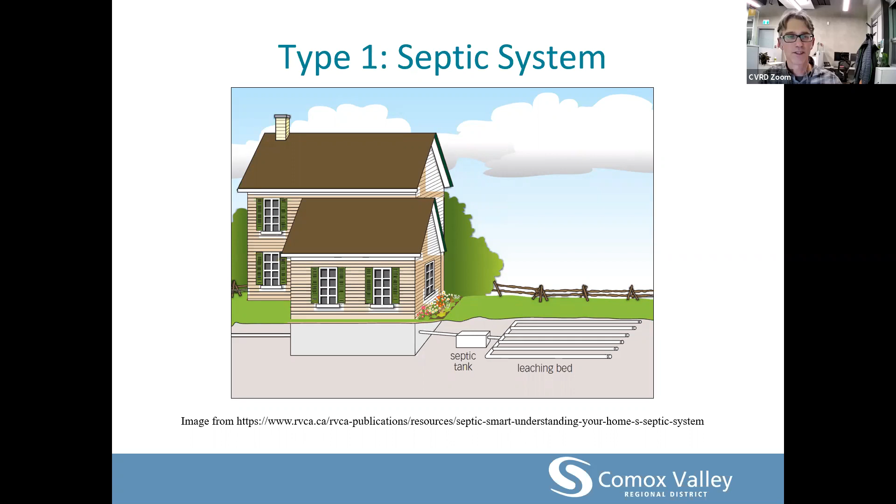There can be many different styles, dimensions, and plans for septic systems, taking into consideration factors such as soil type, topography, and drainage.

Here's a little bit more about what's inside a septic tank. Depending on the age of the tank, there might be one or two compartments. The purpose of the septic tank is to separate liquids from solids and to start to break down the organic material in wastewater. So as the wastewater comes out of the house and into the septic tank, its velocity slows down and the heavier materials settle into the bottom of the tank—this is called the sludge layer—and the lighter materials float up to the top and form what's called the scum layer.

Anaerobic bacteria present in wastewater will start to break down the materials in the sludge layer, but don't break it down completely, and this is why septic tanks have to be pumped out over time. In a two-chamber tank, you have a baffle here, and this directs flow out of this primary chamber, and also helps to prevent solids from getting out the outlet tee and into your drain field.

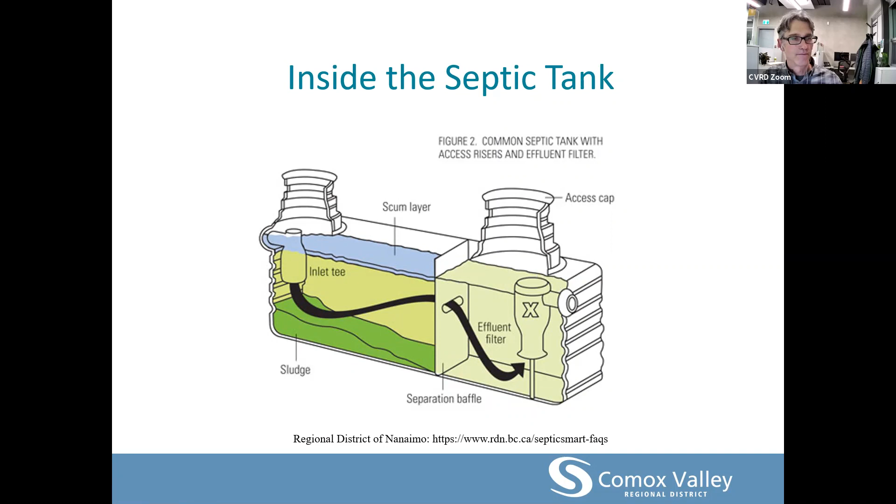Now the next types of systems, these are your type 2 and type 3 systems, also known as package treatment plants. These provide a higher level of treatment to produce better water quality, and they achieve this through aerobic treatment technology where air is pumped into the system.

A type 2 treatment plant will produce an effluent with a consistent quality of less than 45 milligrams per liter of total suspended solids, or TSS, and a 5-day biochemical oxygen demand, or BOD, of less than 45 milligrams per liter. A type 2 system is typically used where site conditions make it impossible to install a conventional septic system. This could include things such as a high groundwater table, bedrock, poor soil conditions, or a smaller property where you don't have the ability to meet setback distances from surface water, wells, or property boundary lines.

The treated effluent from a type 2 system can typically be discharged into a smaller area than that required for treatment by a conventional drain field.

Type 3 is similar, although it produces even better quality effluent containing less than 10 milligrams per liter of TSS and 10 milligrams per liter of BOD. Effluent from a type 3 system will typically be clear, and a type 3 system is typically only used in the toughest site conditions.

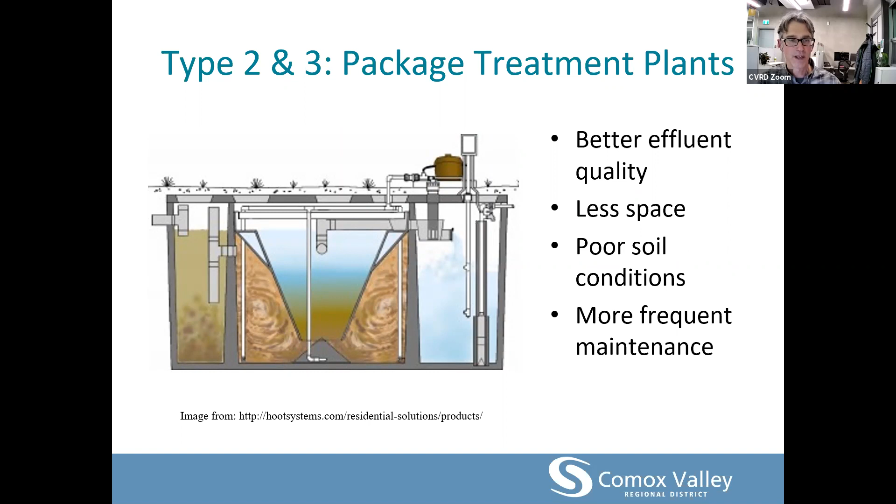Next, this illustrates risers. You could see them sitting on top of the septic tank in the previous slide. These are installed to make maintenance of your septic tank and other components of your system a lot easier. If you've got risers on your tank, next time it needs to be inspected, it doesn't have to be dug out. And these riser lids are also visual cues of where your septic system components are within your yard.

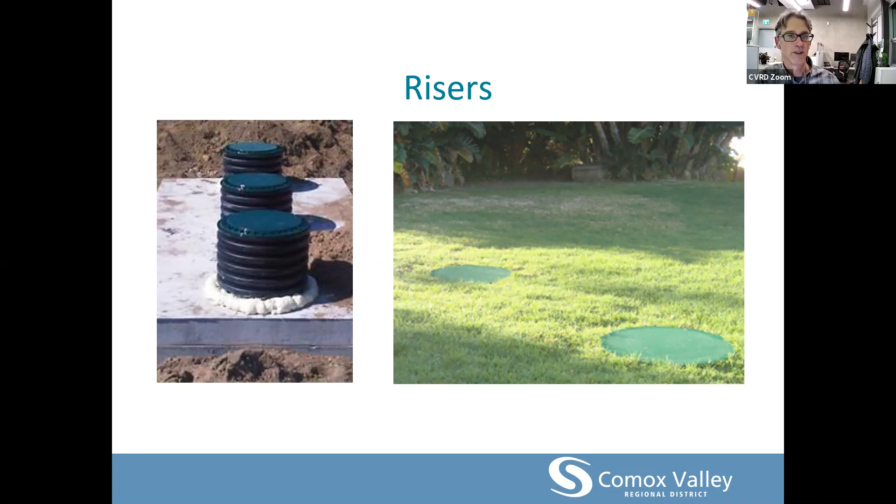Next thing to consider is an effluent filter. Effluent filters can help maximize the life of your system by providing another barrier for solids that didn't settle out in your septic tank, filtering them out before they get out into your drain field where they could cause problems. Effluent filters do have to be maintained, but it is a better option than having solids getting out into your drain field and causing issues.

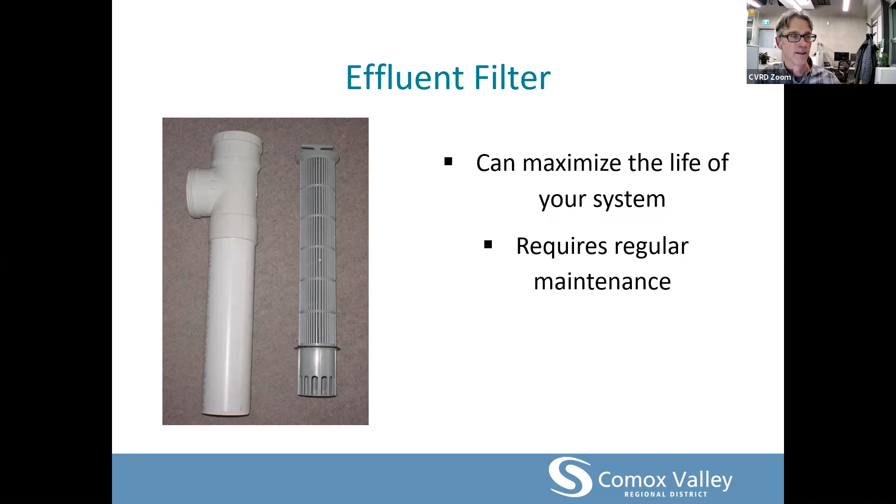Next is the distribution box. This can be considered the heart of your gravity-fed system. In the distribution box, the effluent comes in from the left, as shown on the graphic. The purpose of the distribution box is to ensure that equal amounts of the effluent travel to all the different runs within your septic field. This diagram shows speed levelers, and these make it easy to level out the effluent level within the distribution box, facilitating an equal amount of effluent getting out into all the runs of the drain field.

This is important because you don't want all of the effluent going out into one run and overloading the soil in that part of your drain field.

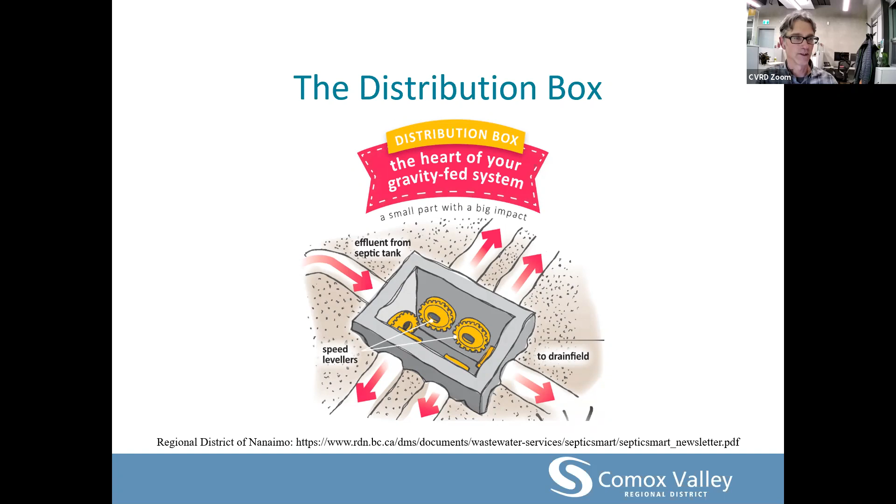This slide shows how a typical drain field would look while it's under construction. A drain field typically consists of 3 to 6 trenches, 18 to 24 inches deep, with perforated pipe laid in gravel, covered by soil. Underneath the soil is what performs the final wastewater polishing before the wastewater gets down to the barrier layer, whether that be the groundwater table or bedrock.

So the performance objective for effluent before it reaches the barrier layer is for it to meet recreational water quality guidelines or better. This is important because the effluent may not be fully treated once it reaches the water table and could still contain pathogens. That's why there are also setback distances to wells, breakout points, and water bodies that are very important. These setback distances are a final step in protecting public health.

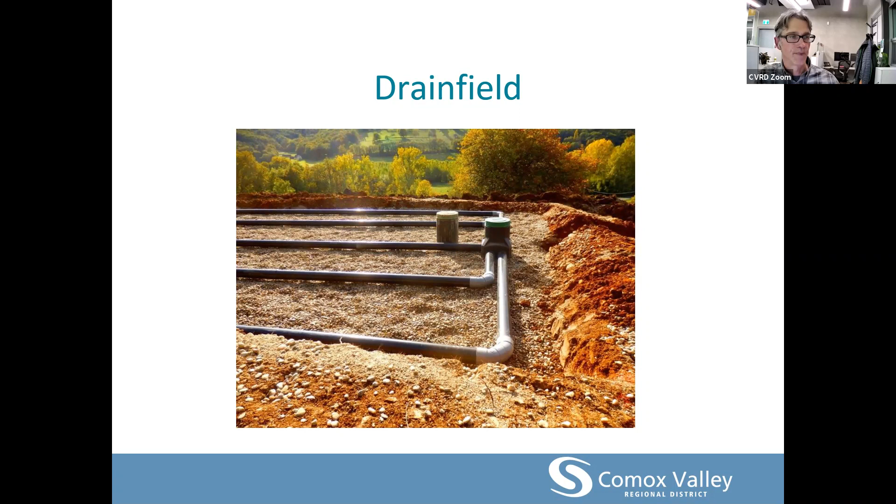Pressure distribution can be used instead, where a pump delivers doses of wastewater under pressure out to the laterals of the distribution system. The system consists of smaller 1 to 2 inch diameter laterals with small discharge orifices, and the pressure from the pump pushes the wastewater out of the laterals and into the soil for final polishing.

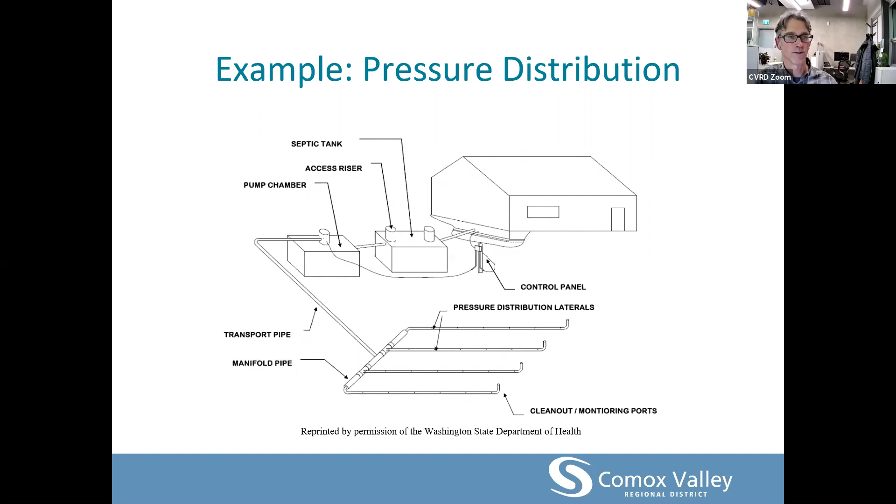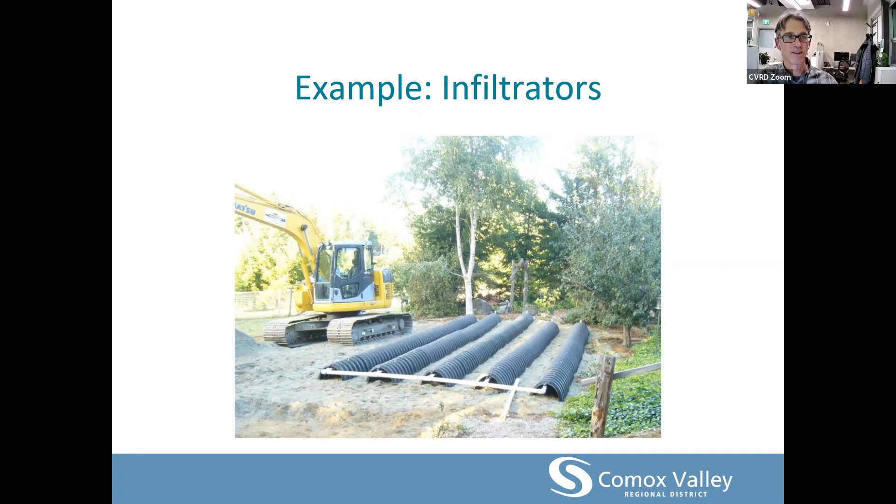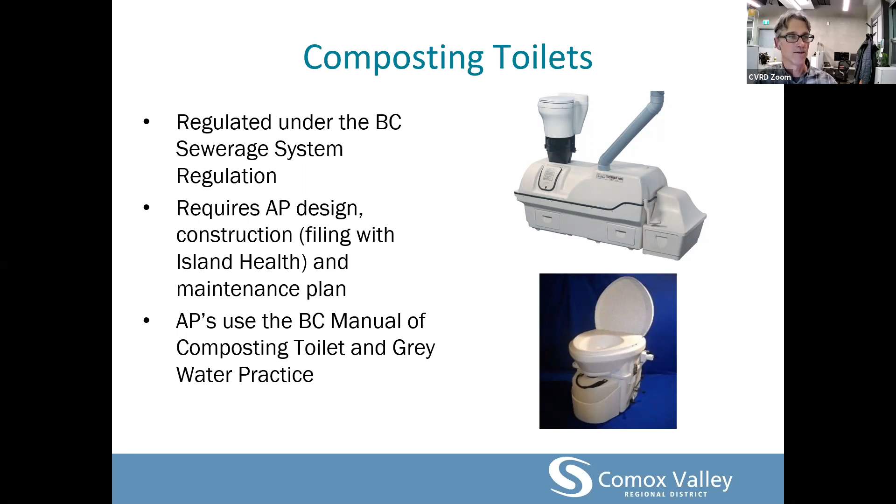In the next slide, we'll talk a little bit about composting toilets. These can be an effective option where water supply is constrained. Composting toilets are also regulated under the BC Sewerage System Regulation, and they require authorized person design, construction, and a maintenance plan. Authorized professionals can use the BC Manual of Composting Toilet and Greywater Practice to guide the design and installation of a composting toilet system.

Some pros and cons of composting toilets: as said, they conserve water, so in areas where water supply is constrained, they can help reduce indoor water use. This also results in less sewage effluent flowing out into a wastewater system and into the environment. This can make composting toilets an alternative option where there are constraints that limit the use of a conventional septic system.

This can also reduce stress on an older septic system and keep it operating a bit longer than if conventional toilets were being used. There's also potential for beneficial reuse of the compost from the composting toilet, termed residual organic matter, or ROM.

In terms of considerations, composting toilets can be more expensive. There can be odor or insect issues if they're not properly managed. They require an electrical supply to add extra heat or ventilation for the composting process. The composting process can be challenging to manage, as can management of the residual organic matter. It's also important to note that a sewage system is still required for all the greywater coming out of the home.

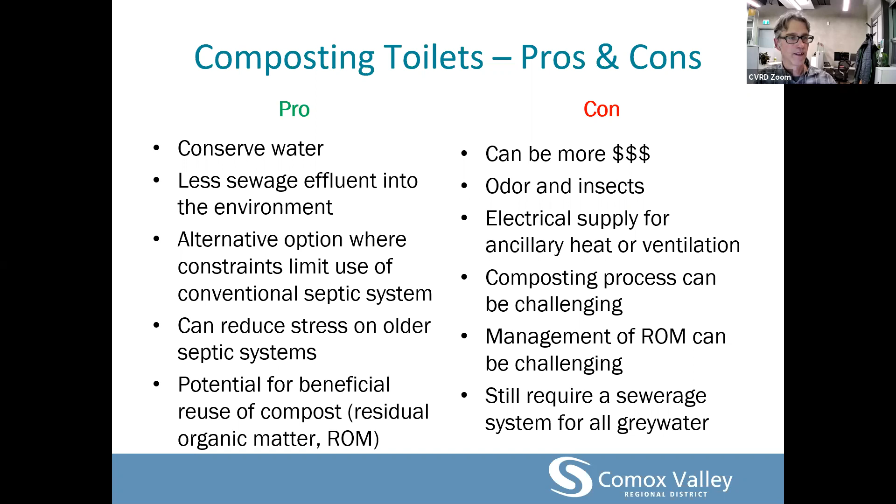Let's talk a bit about septic system care. The first step is locating your system, and judging by the poll, it looks like most of you knew where your system is, so that's good.

The next step is to create a simple sketch of your system. The maintenance record we provided on our website has an area on the back where you can draw a diagram of your septic system and include measurements to a corner of your house or other landmarks on your property, so it's easy to locate in the future.

If you are unsure where your system is located, you might be able to obtain a copy of your paperwork from Island Health. There could be a construction permit on file if your system was built between 1968 and 2005, or a sewage system filing should be on file if it was built after 2005.

Another thing to consider is whether your system is big enough. If the use of your household or property changes—for instance, you're adding a basement suite or an Airbnb suite, or more family members are moving into your home—it might be important to assess the capacity of your septic system to ensure it can handle the change in use of your property.

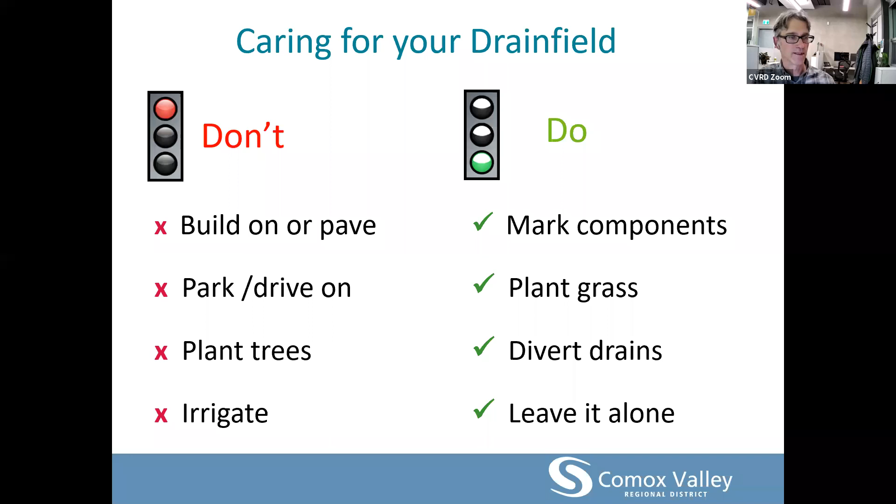Another consideration is water conservation. This is a key element to keeping your septic system healthy. Too much water use can flush solids into your drain field and can also saturate the soil. This can affect the drainage of your drain field and the bacterial action treating the wastewater. Minimizing water use helps keep the solids settled on the bottom of your septic tank and improves the efficiency of your system.

You don't want to overload your system, as this can cause premature malfunction. Overloading it can take the form of doing too many laundry loads over the course of a day. It's a good idea to spread your laundry loads out over the day or over the week.

Conserving water is particularly important if you have an older septic system. Older systems were designed when people used less water. This means that if your system is older, it might be under capacity compared to today's standards. There is more information on water conservation in one of the septic fact sheets available on our website and as part of the participant package.

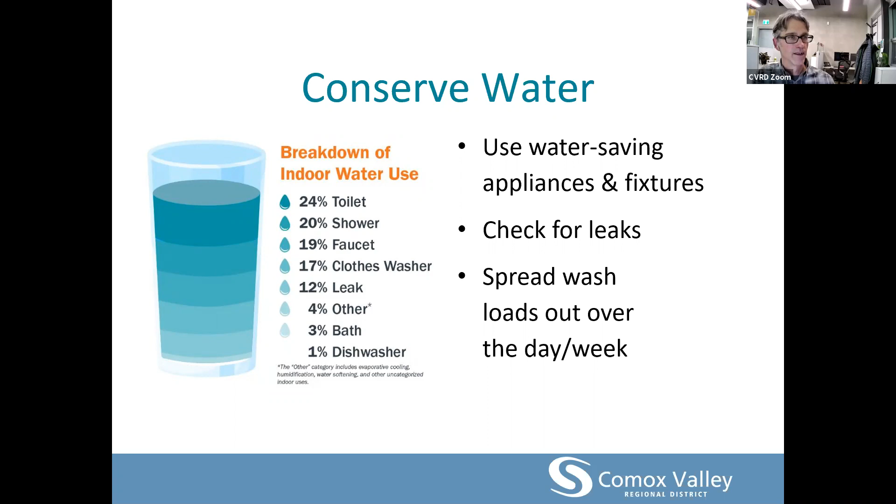In terms of what can go down the toilet, the 3 P's are what's important to remember: pee, poo, toilet paper, and nothing else. With the exception of toilet paper, if you haven't eaten it first, don't flush it. You don't want to use your toilet like a garbage can and flush down things like dental floss, facial tissues, garbage, grease, chemicals, or other solids. These can get into your drain field and cause issues.

In terms of septic additives, they're not recommended or necessary. The material coming into your septic tank already contains all the microbes it needs for the breakdown of pollutants within wastewater. For this reason, these additives aren't necessary.

In regards to medications, you don't want to flush medications down the toilet. You want to return them using the medications return program provided by the Health Products Stewardship Association. For more information, you can go to their website, healthsteward.ca. Most pharmacies in BC are part of this program, and for residents of Denman Island, I believe your nearest options are going to be in Courtenay or Comox.

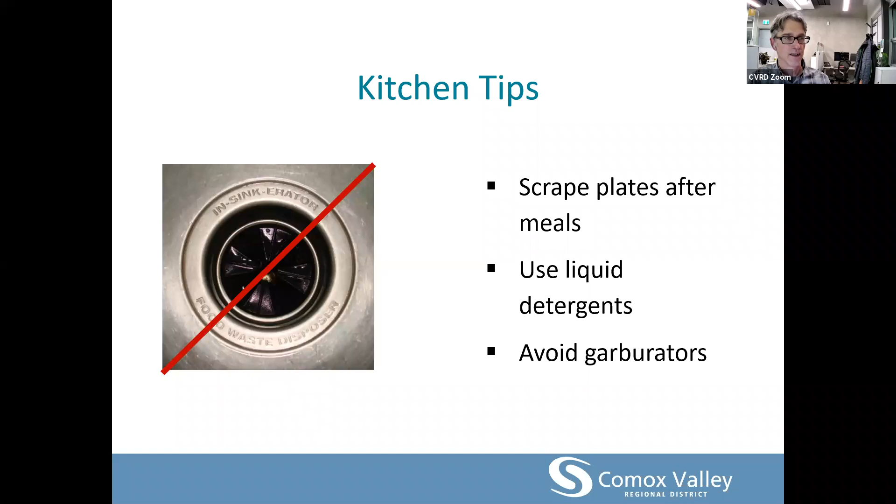You also want to use greener cleaners where you can, as some chemical cleaning products can be harmful to your septic system. As mentioned, the soils in the drain field contain microorganisms, and these are also sensitive to harmful chemicals. In order to keep your system healthy and protect the environment, it's important to watch what goes down the drain.

I've got some numbers here about what it takes in terms of introducing various substances to cause a septic tank die-off. So in a 1,000 gallon tank, if 7 liters or more of bleach is added, that can cause issues. 19 liters or more of Lysol can cause issues. Or this one is interesting, 11.3 grams of Drano, that's less than a tablespoon.

It's important to note, all systems require maintenance. You want to maintain your system to prolong its lifespan. Depending on the makeup of your system, this could involve cleaning your effluent filter, checking pumps, alarms, electrical components, pumping out your septic tank, checking for leaks, checking the alignment of your distribution box to ensure the effluent is flowing equally to all the runs in your drain field, and also flushing the pipes in your drain field. The record sheet included in the package is useful for keeping track of the maintenance on your system.

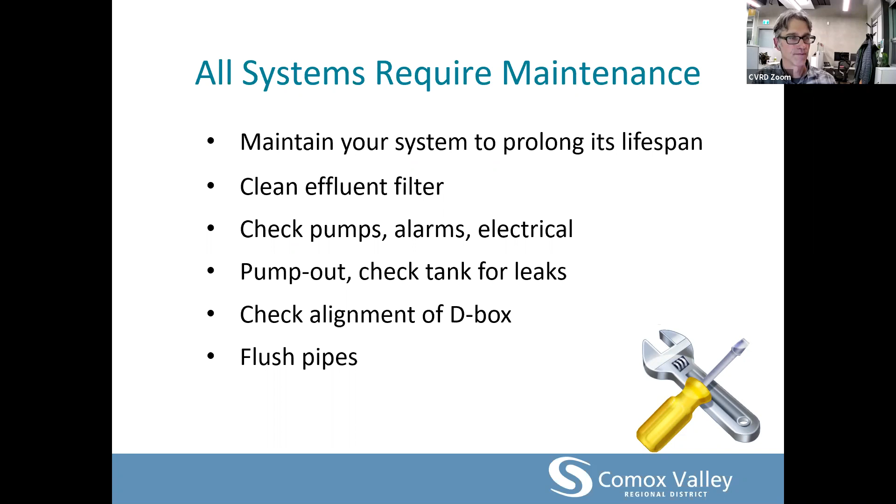In regards to costs of maintenance, these are relatively recent industry costs for Vancouver Island. It's important to note that everyone does have to pay for maintenance. Those of us who live within a municipality hooked up to a sewer pay through property taxes to maintain the sewer system and treat the wastewater. By the same rationale, those connected to a septic tank have a responsibility to look after the septic system to ensure that the wastewater is being properly treated.

So these costs of maintenance: up to $600 for a tank pump out, up to $800 for annual maintenance and monitoring, up to $900 for a maintenance assessment, up to $300 to install an effluent filter, and $300 to $600 to install a couple of risers.

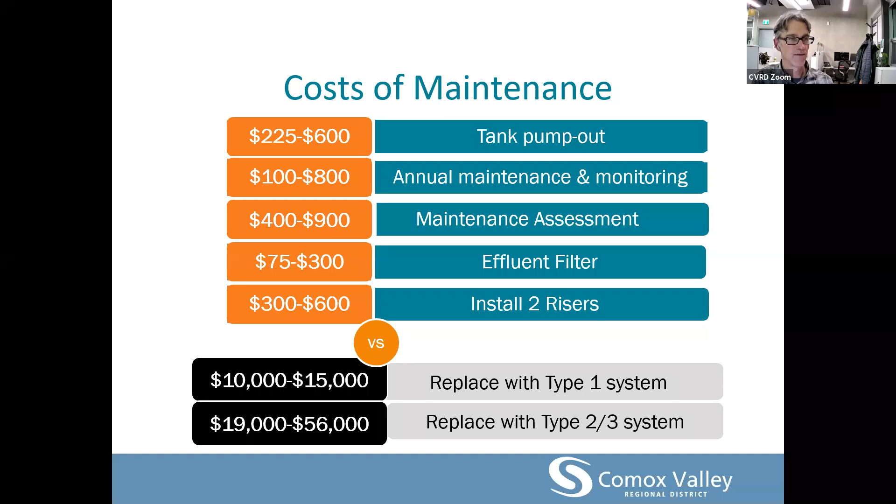And then when you relate those costs to the cost to replace the system, $15,000 or even more for a type 1 system if there's a pressure distribution attached to it, or substantially more for a type 2 or 3 system, and there are design costs to consider on top of these installation costs as well. So to maintain your system and keep it operating is definitely the better option than having to replace the system due to lack of maintenance.

In regards to pump out and inspection, the frequency is going to depend on the size of your septic tank, what goes down the toilet or the drain, and the use of your home, how many people are in your home. Generally, a type 1 system should be pumped out every 3 to 5 years, and a type 2 or 3 system has to be inspected every year.

Maybe, can I make a comment on that one there? Yeah, sure, Ian. I think with the type 1 system, modern type 1 systems generally should go more than 5 years between pump outs, but depending on the design, should be inspected more often than that. Right, so if it's a pressure distribution system, annual maintenance is a good plan. And even a gravity system should be checked regularly. The effluent filters often need to be cleaned in between pump outs as well. Okay, yeah, thanks for that, Ian.

In regards to records, it is important to keep your maintenance records. These should also be passed on to new homeowners after the sale of the property. Keeping good records is a way to demonstrate good maintenance of the system, and will be helpful when it's time to sell your property. As stated earlier, copies of some records might be available at Island Health.

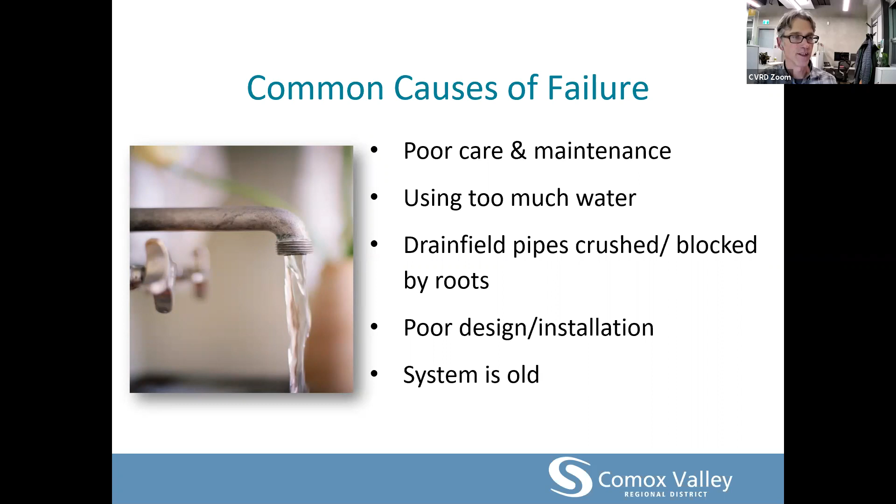Let's talk about what to do if you're experiencing a failed system. Some of the common causes of failure: one is poor care and maintenance, another is high water usage, which would overload the system and cause it to fail. Another cause is if your drain field pipes have been crushed or blocked by intrusion of roots. Another potential cause is poor design or installation of your system. And lastly, it could just be that the system is quite old and some components are reaching the end of their lifespan.

Some of the signs of failure include slow and backed up drains within the house, some spongy ground within the area of the drain field. You might see some lush vegetation growth due to high level of nutrients in the ground. And another thing could be poor foul odors. So what you want to do is stop, look, and smell.

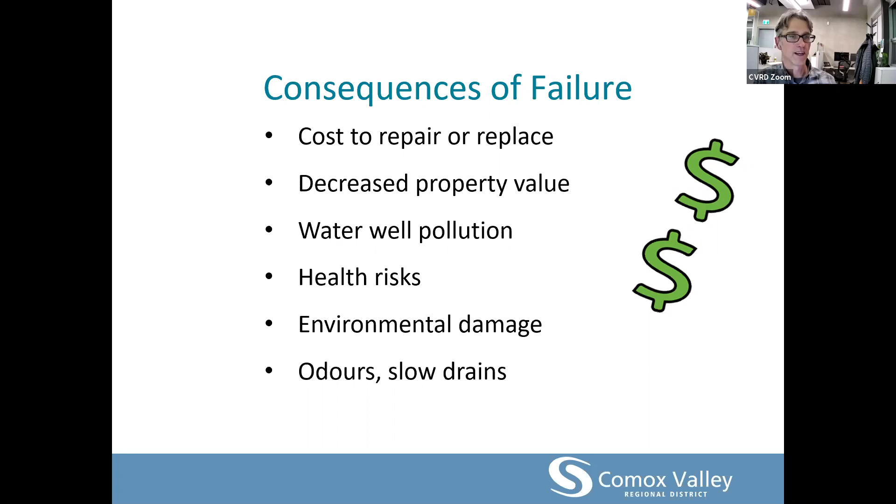So some of the consequences of failure are, obviously, the cost to repair or replace. A failed system will reduce your property values and cause foul odors throughout your home and property. This could also result in water well pollution and create health risks and environmental damage. It's important to remember that maintenance and monitoring will extend the life of your system and save you money over the long run.

This next slide illustrates the potential impacts of a failing system. You can see the water coming down from the drain field back below the groundwater, and if the groundwater is moving from right to left, if the septic system isn't operating properly, there could potentially still be pathogens within the groundwater by the time it reaches the well. So it's important to maintain septic systems to prevent health risks such as this.

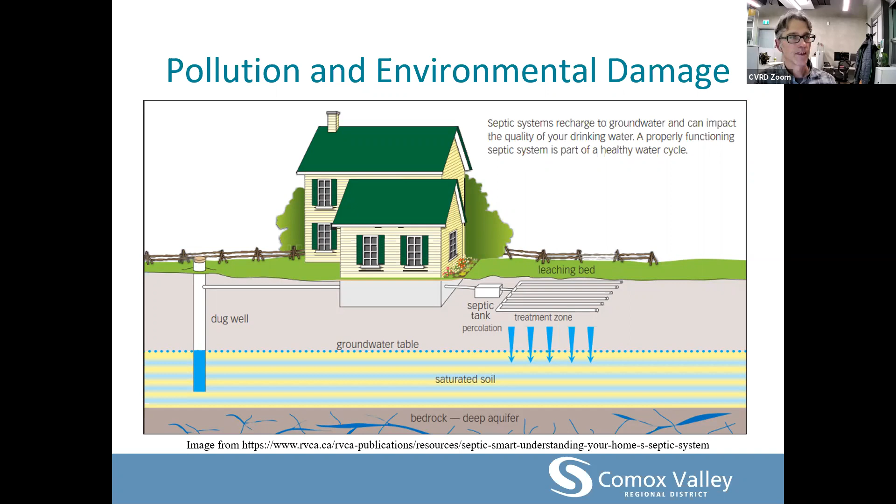If you feel that your system is failing, it's important to locate any records that you do have. You're going to want to contact an authorized person to come and have a look at your situation and offer some advice on how to fix the problem. Having your septic tank pumped out can help alleviate the problem, at least temporarily. Along with conserving water, this can reduce the amount of water heading out into the drain field and help the situation out. You may want to fence off the area if there is wastewater on the surface to help prevent people and pets from contacting the effluent. Once you do have an authorized person on site, they can put together a maintenance plan for you.

We'll talk a bit more about authorized persons, continuing from what we started with at the beginning of the presentation. The sewage system regulation defines who can work on your system. This regulation was enacted on May 31st of 2005, and it replaced the former sewage disposal regulation. If your system was built before May 31st, 2005, an authorized person is required for repairs and upgrades on your system, and is recommended for maintenance. If your system was built after May 31st, 2005, you require an authorized person for repairs, upgrades, and maintenance. Your system should have a maintenance plan with it, and it should have been designed following the standard practice manual.

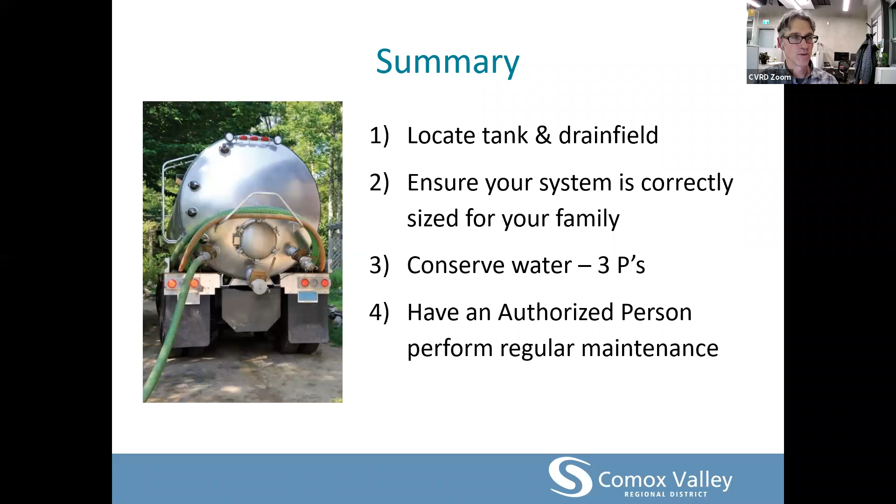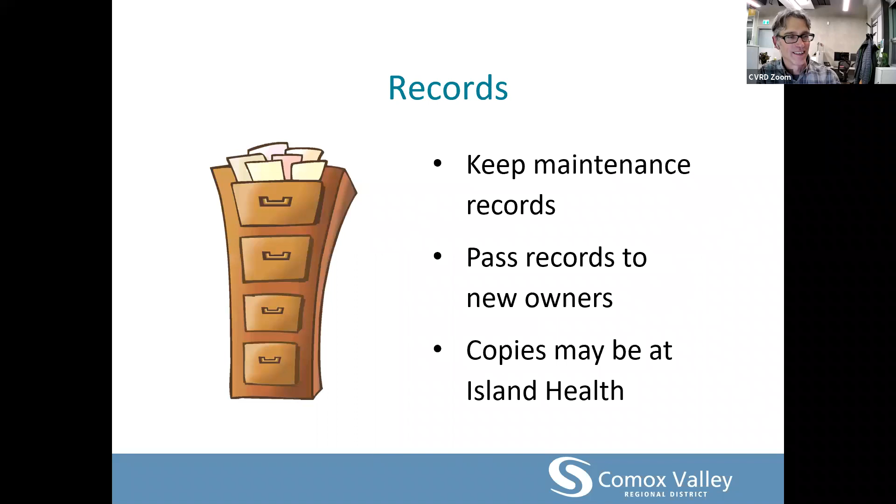Another question: does green over the septic field in a really dry season mean the system is failing? No, I would say that if the green is reasonably well distributed over the area, it's probably an indication that the septic system is sending water to that area. Normally when you get a problem, you have kind of wetland vegetation in one part of the field area and the rest of it dry.

Next question: is grass recommended to plant over the field, or do we just have whatever grows naturally? Root intrusion can be a serious problem with certain types of sewage system. You will often go and inspect a system next to, say, a cedar hedge, and if it's a traditional gravity system, the pipes are completely plugged with cedar roots. So unfortunately, for some types of systems, the best thing is to have grass over the top of it. There are other systems which can safely be installed amongst trees, but if it's an older system, it's better to keep the trees away from it.